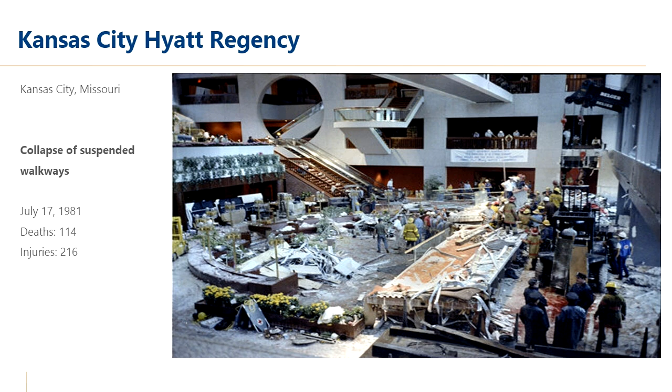The so-called skywalks were suspended from the roof framing. The second floor walkway was suspended from the fourth level walkway. The collapse initiated at the upper level connection near the middle of the walkway. The hanger rod between the roof and fourth level is represented by the blue dashed lines.

The walkway collapsed due to two mistakes. First, the connection detail was inadequate. The connection of the hanger depended on the transverse bending strength of two small channels welded toe-to-toe, which folded inward at the hanger rod connection.

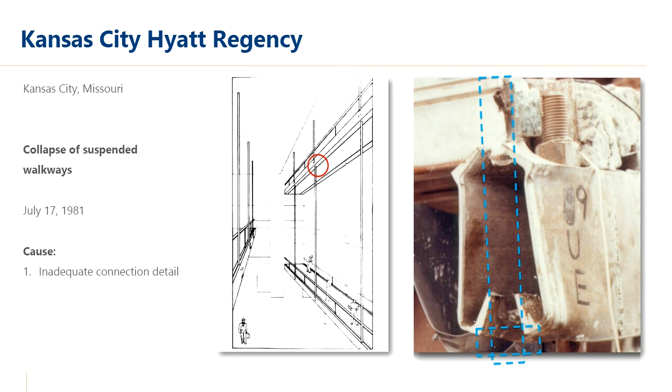Second, the hanger rods were reconfigured, as can be seen by comparing the design connection detail at the left to the as-built detail to the right. The reconfiguration doubled the amount of load transferred at the fourth level connection. These mistakes led to twice as much load being transferred at a connection whose design was inadequate in the first place.

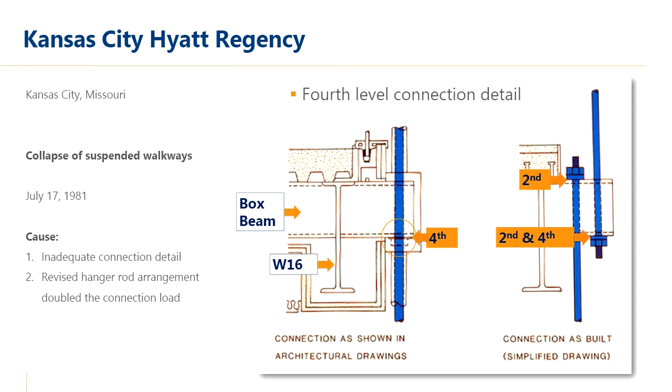In September 1996, six months after the post-tension concrete bridge was retrofitted to correct midspan sag, the 790-foot main span of the Koror-Babeldaob Bridge, also known as the KB Bridge, suddenly collapsed into the Toagel Channel. The cast-in-place post-tension box girder bridge was built in the mid-1970s. Two motorists were killed and four more were injured. Local fishermen and dive shop operators managed to save many more who plunged into the 100-foot deep channel with a swift tidal current.

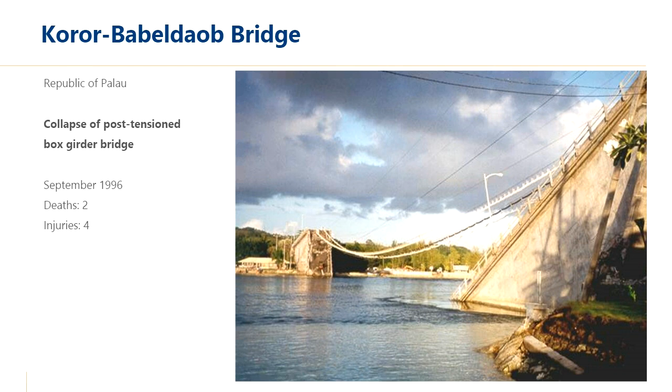This slide illustrates the final retrofit design to correct the midspan sag. After value engineering, the designer agreed to add 8 new post-tensioning tendons inside the box, shown in green, as well as flat jacks in the center hinge, used to lift and separate the cantilevers. The final step in correcting the sag was to add a 240-foot concrete ramp in the midspan region.

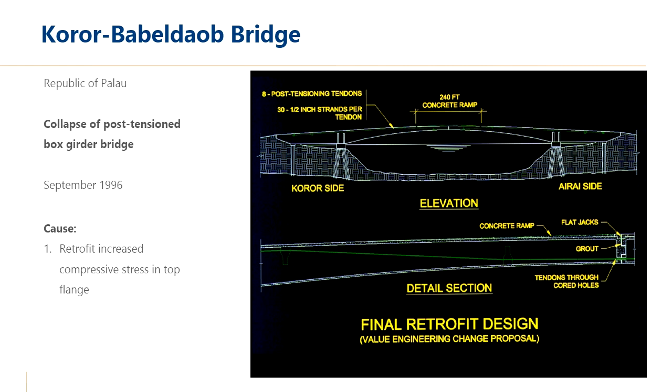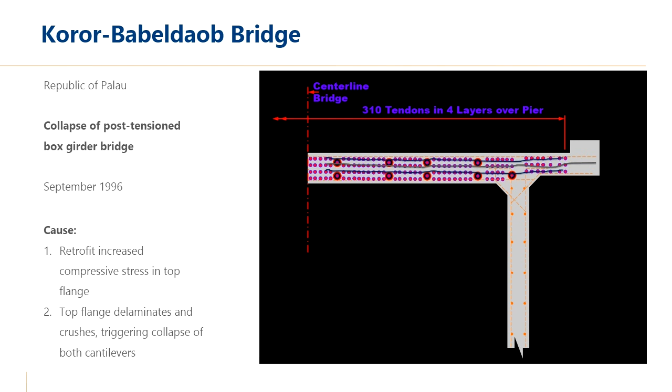The retrofit, especially the flat jacks, added considerable compressive stress to the top flange. Over the pier supports, there was very little concrete between the post-tensioning tendons. As such, the added compressive stress led to planar cracks between the tendons, separating the flange into multiple layers. This in turn led to compression failure of the top flange due to buckling of the individual laminations, a phenomenon known as lamellar buckling.

The next series of slides illustrates the progression of the collapse after compression failure on the Airai side of the bridge.

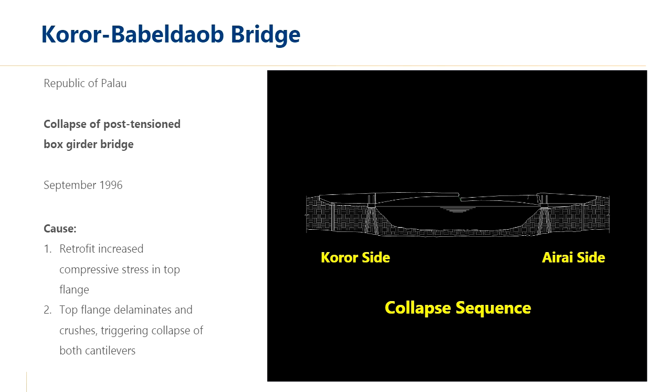Loss of the top flange triggered compression failures of the web walls and bottom flange, such that the Airai side cantilever shifted to the right, opening the center hinge. As the Airai cantilever collapsed, the new construction tendons pulled down on the Koror cantilever. Both cantilevers then collapsed, eventually coming to rest on the bottom of the channel.

The Twin Towers of the World Trade Center collapsed on September 11, 2001, shortly after hijacked airliners flew into the towers. The terrorist attack killed 2,752 people, including passengers and crew of the 2 airplanes. Following the attack, hundreds of police, firefighters, contractors, and engineers, as well as volunteers from across the U.S., worked to rescue survivors, recover bodies, and clean up the site.

It's truly heartbreaking.

As to cause, NIST, the National Institute of Standards and Technology, concluded that the collapse of each tower resulted from the combined effects of airplane impact damage, widespread fireproofing dislodgement, and the fires that ensued.

From a structural engineer's perspective, it is noteworthy that the towers remained standing after the initial impacts. In spite of severe structural damage, the North Tower stood for 1 hour and 42 minutes after impact. The South Tower collapsed 56 minutes after impact.

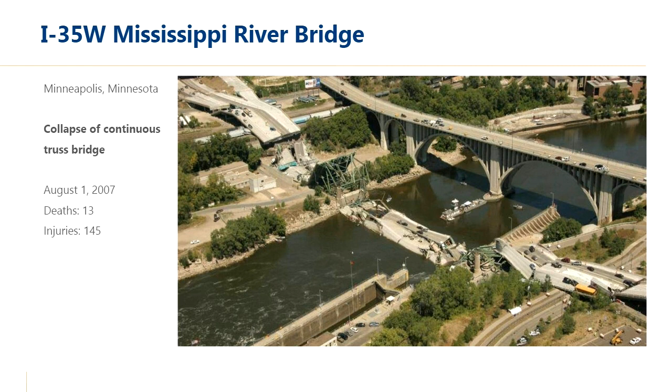During the evening rush hour on August 1st, 2007, the I-35W bridge suddenly collapsed, killing 13 people and injuring 145. The central navigation span of the continuous below-deck truss bridge was 456 feet long.

Emergency personnel and civilians worked through the night, rescuing people who were trapped in their vehicles. 75 local, state, and federal agencies were involved in the rescue and recovery.

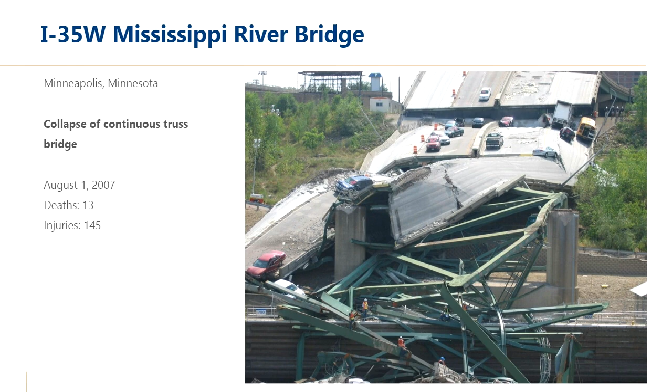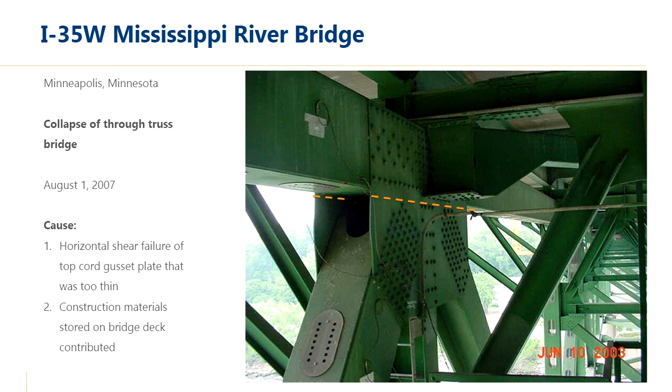Most investigations, including separate investigations by NTSB and WJE, concluded that the primary cause was horizontal shear of the top chord gusset plate along the dashed line shown here. The gusset plates should have been thicker, in other words, a design error. Construction materials stored on the bridge contributed.

Thanks for introducing those, Gary.

The final collapse that we'll talk about today is the most recent one as well, and that's the partial collapse of the Champlain Towers South condominium. Champlain Towers South was a conventionally reinforced 12-story, 136-unit beachfront condo in Surfside, Florida, and it was constructed in 1981.

The partial and disproportionate collapse of Champlain Towers South was devastating, an event that occurred on June 24th, 2021, just over 3 years ago now. This tragedy claimed 98 lives and has profoundly impacted the local community in Florida, as well as how we treat buildings and inspections of buildings statewide.

Following the collapse, the Condominiums Association's receivership hired WJE to assist in the investigation and provide expert witness and consulting services. In the next few slides, we'll briefly discuss some of the critical factors that contributed to the collapse.

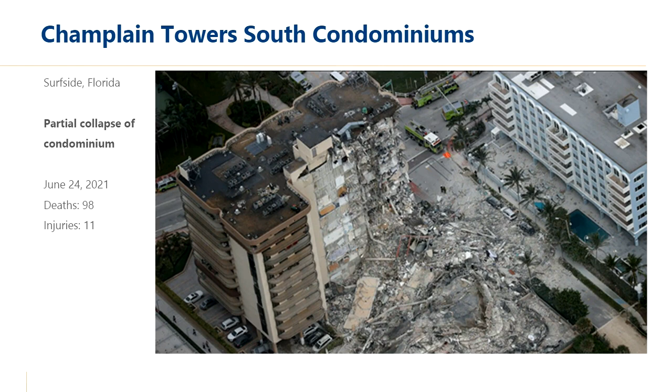In 1996, a contractor working on the structure along with an engineer added more load to this deck. It was not originally covered with pavers, which also include a sand bed layer and waterproofing.

This is significant. Video and evidence and eyewitness reports confirmed that the pool deck actually collapsed first, about 7 minutes before the rest of the building. Unfortunately, the engineers working on site missed telling signs of punching shear related distress.

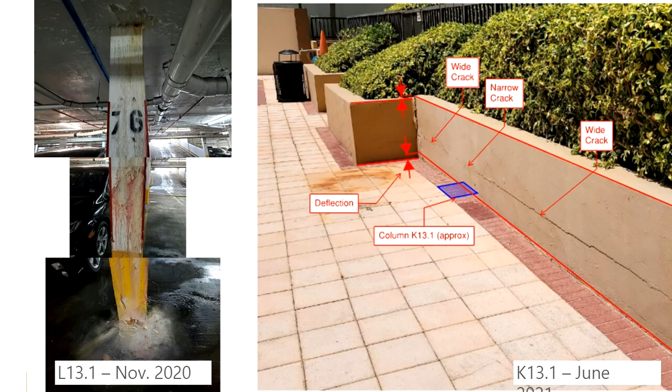And here are two of those photos that we found. Consider the photos from November of 2020 and of June of 2021. On the left, we see a photo showing efflorescence and water staining on a column. This is indicative of punching shear related distress.

The photo of K13.1 on the right is just taken a few weeks before the collapse and shows large vertical movements of the pool deck reflecting into the planters. Unfortunately, neither of these really sound an alarm to shore or to stabilize the structure.

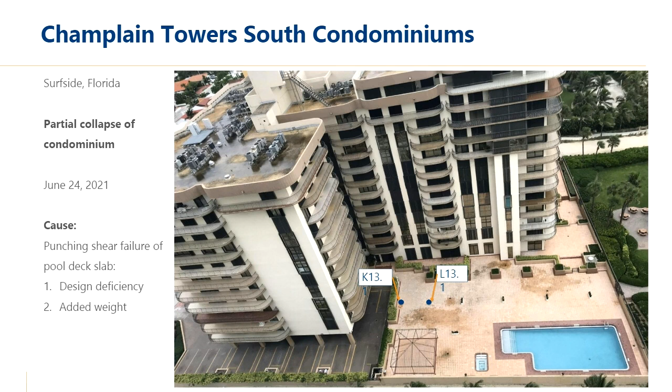So now let's take a cut and look around K13.1 and see how the collapse manifested. Imagine we're standing at L13.1 looking west, away from the beach, at the slab prior to any failure, in its original state. Given the design failures, the significant under-design of the structure, shear and flexural cracking were highly likely, as shown here.

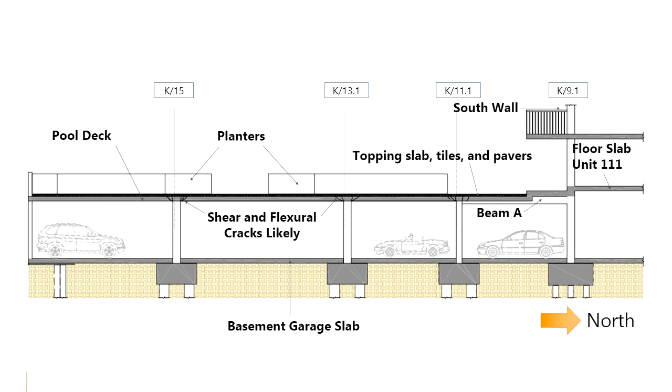We know that around early June 2021, just a few weeks before the collapse, there was significant movement of the slab, reflecting into the planters, showing this distress in the animation. On June 24th, 2021, at about 1:10 in the morning, the pool deck collapsed as a result of punching shear failures.

And to explain that, with pen and paper: it's a mechanism essentially where the deck comes down and the column punches through, right? That's all it is. And it was here.

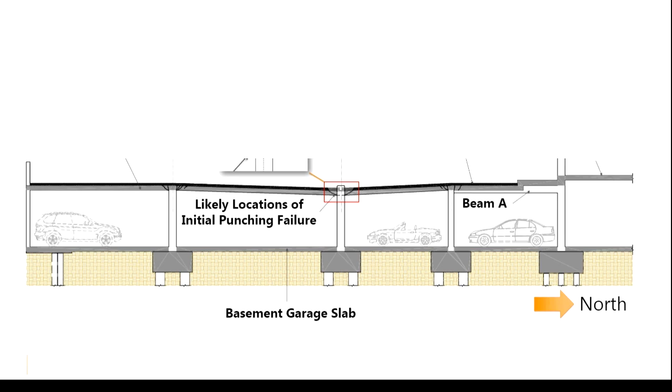As this building moves and deflects under large displacements, we start needing to consider horizontal forces. Those forces, represented by the orange arrows on the right, damage the columns at the south face of the building, which is why the building appears to be collapsing from the south.

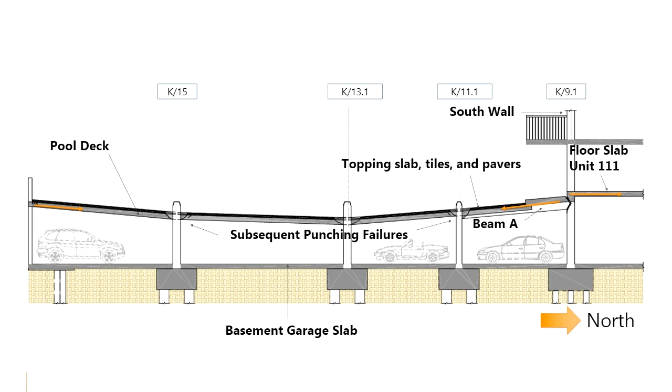There was significant movement of the columns once the collapse of the pool deck happened, reflected and confirmed by video footage and eyewitness accounts. Finally, the building collapsed about 7 minutes after the collapse of the pool deck.

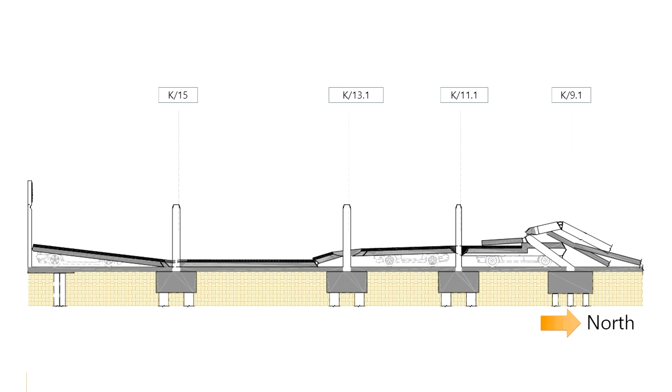So this building both suffered a disproportionate collapse, where a small collapse led to a larger collapse, and thankfully only a partial collapse of the rest of the structure.

I know you may want more detail as to why these tragedies happened. Let me apologize in advance: as I said, our objective is to explain what to expect in the aftermath of a collapse and describe the key steps in the investigation. There is simply not enough time to explain the technical causes of these collapses in more detail. However, in the resources list on your screen, there are links to articles, reports, and presentations that delve into the causes of these collapses.

So let's get into it. What happens in the aftermath of a failure? The key considerations are rescue and recovery, site control and safety, who the interested parties are, the need to preserve key evidence, and finally restoring service or resuming construction. Details will be provided in the slides that follow.

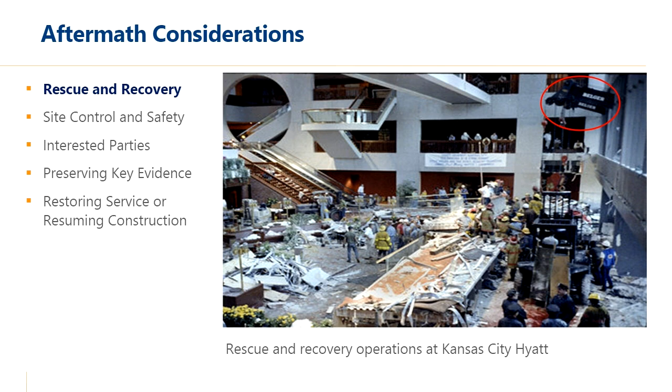Regarding rescue and recovery, using the Hyatt as an example: after the collapse, emergency medical teams, firefighters, and police worked through the night to rescue survivors. Local construction contractors provided equipment, including forklifts and cranes. The crane used to lift the walkway segments was positioned outside the hotel, shown in the red oval on the slide. The crane boom broke through the plate glass windows. The rapid and coordinated response is considered a textbook example of how best to respond to a major collapse.

Immediately following the Champlain Towers collapse, a significant search and rescue effort was undertaken, and the site was controlled by both Miami-Dade police and fire units, as well as FEMA, which sent urban search and rescue units to the site. In addition, other parties helped throughout the rescue and recovery effort, including the Israeli Defense Force and members of other nonprofit organizations. This site then remained a rescue and recovery operation for nearly a month.

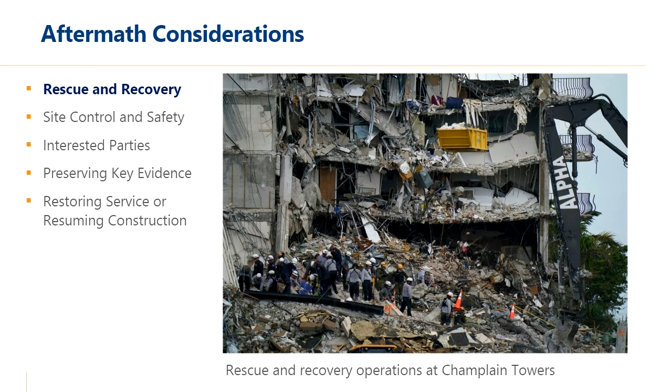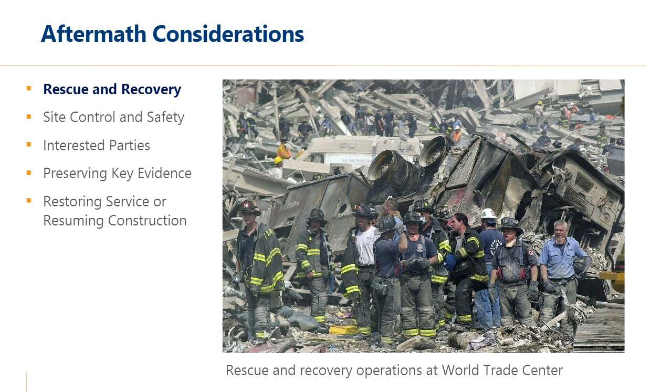In the wake of the World Trade Center collapse, the tireless work of police, firefighters, and other first responders was amazing, especially in the early hours. Structural engineers provided support to police, firefighters, and construction workers to investigate the condition of partially damaged buildings and potentially unstable debris piles. The structural engineer's role was in support of the primary first responders, and I was part of that effort, seen here assessing the safety of a subway tunnel underneath the debris.

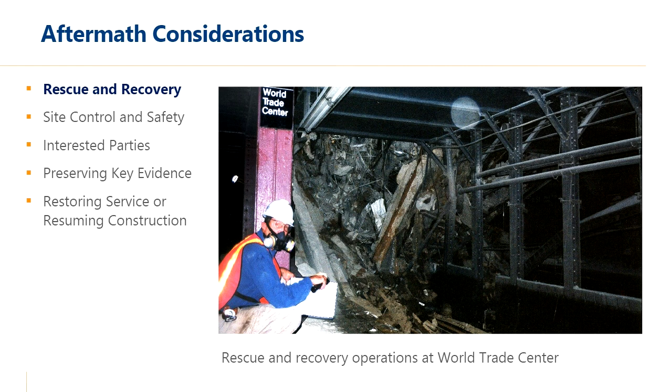The key takeaway is that during rescue and recovery, the first responders are in charge and calling the shots, but they may need outside support, such as rescue teams, search and rescue dogs, heavy or specialized equipment, and even structural engineers. In my experience, these groups are anxious to help in the wake of a disaster.

Now let's move to site control and safety. It may not always be clear who is in charge in the aftermath of a collapse.

Usually, if the facility is in use, the owner or property manager has control of the site after it is turned over by the rescue and recovery team. Facilities under construction are in the control of the contractor or construction manager.

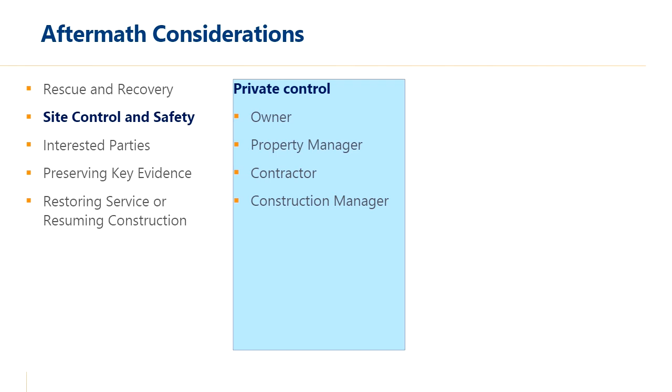However, government agencies may also exercise their right to carry out an investigation. And if criminal activity is a suspected cause, law enforcement may declare the site a crime scene and assume control, which is what happened after the Champlain Towers collapse.

By law, the National Transportation Safety Board, or NTSB, is required to investigate bridge collapses that result in loss of life. The site and key evidence are under their control, and they have the power to subpoena and interview involved parties.

The National Construction Safety Team, NCST, operates under NIST. NCST chooses their investigations based on the significance of the collapse. Of course, they chose to investigate at Champlain Towers.

Finally, if the site is under construction at the time of the collapse and workers are injured, OSHA may investigate.

Collapse sites are inherently dangerous, and the safety rules developed for construction sites do not necessarily apply. Early on, access should be limited to personnel trained in site safety and collapse investigation.

While access to construction sites is usually controlled, there is no security perimeter in place following collapse of a facility in use. The media and general public will attempt to gain close-up access. Immediately following the collapse, the local police can be helpful in setting up and enforcing a temporary perimeter until more permanent security measures can be established.

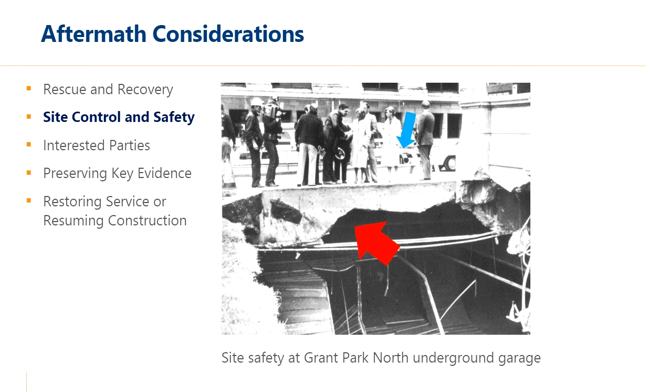As I said, collapse sites are inherently dangerous.

Within 2 or 3 days after the collapse of the World Trade Center towers, officials developed guidelines for site safety and personal protective equipment. Respirators were provided to everyone entering the site, and their use was strongly recommended.

As soon as practicable, site-specific guidelines for safe access should be developed and, of course, followed.

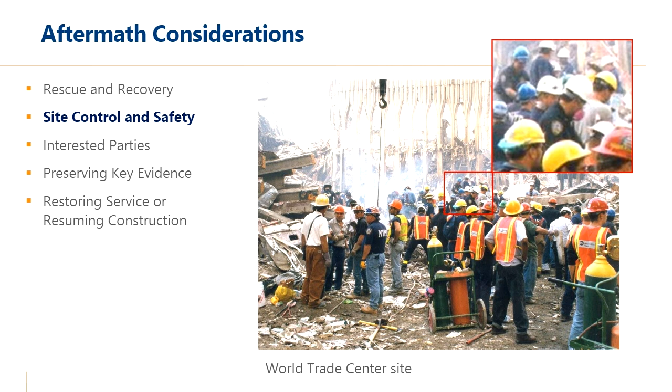At Champlain Towers, every site takes a life of its own, and I think Gary will add to this here in a few minutes. The police constructed barricades and blocked off several city blocks.

This brings up my most recent brush with the law, which was right after the collapse happened, and not just right after, but several weeks after, the site was heavily restricted. However, we were hired by the ownership group.

So after the initial immediate response had subsided, I went to the site and attempted to gain access on behalf of our client, to understand what was going on and make observations. Unfortunately, that was met with a trespass warning and severe displeasure from the local police department. It wasn't really until almost 3 months later that I was able to gain access to the site.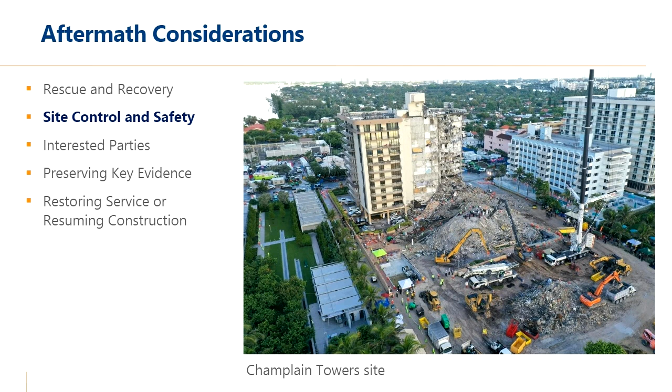I've had different experiences at other collapse sites. So every one of these is different.

Undoubtedly, when there's a collapse, especially when catastrophic, many interested parties will be involved, whether it be the ownership or other stakeholders. That includes property managers, a contractor if the site is under construction, their construction manager and subcontractors, and suppliers if certain pieces of equipment were used.

Designers will always be there, and that will often be the structural engineer of record. Other interested parties that will typically appear are the attorneys representing the stakeholders and victims, and also investigators for the stakeholders, whether those be other engineers like Gary and me, or other sorts of investigators, such as NIST and whatnot.

Politicians will always and almost undoubtedly be at the site. As you saw with Jane Byrne at the Chicago garage collapse, politicians were also very good at getting access to the site and getting photos. The media will undoubtedly be very interested in a large collapse, and that is not any different with Champlain Towers, which we'll talk about next.

Following the Champlain Towers collapse, the mayor, Levine Cava, and Governor Ron DeSantis and their offices organized and coordinated state and federal resources. After the collapse, there's always, as I mentioned, an overwhelming media interest.

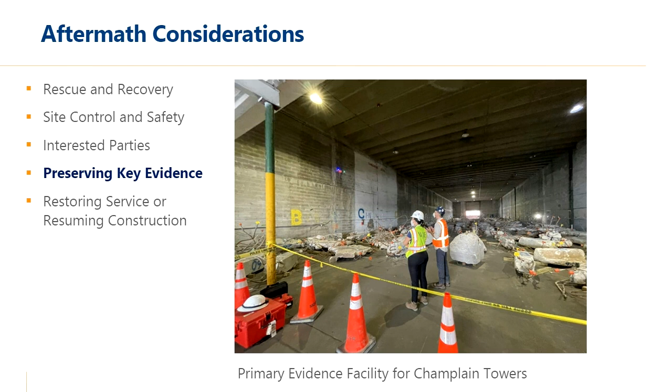So tight, you can see that if you look at the ceiling, not many of the lights are working. There was really no way for them to replace lights and deal with any of that sort of maintenance level kind of issues inside of their building. To that end, they have since subsequently moved evidence into a different area for a better investigation.

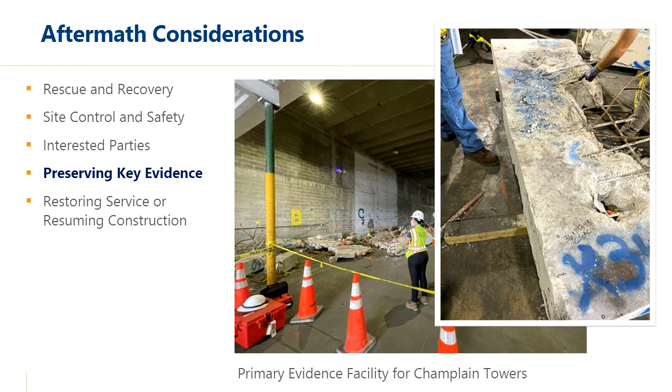Here you can see one of the most useful pieces that we found there, and that's my hand pointing at half of a punched slab, confirming our thoughts and also providing additional evidence for our understanding regarding the construction at Champlain Towers.

Moving on to restoring service or resuming construction. Shortly after the responders have left, there's likely to be intense interest in restoring service to an operating facility or resuming construction of a partially completed structure. Costs associated with loss of use of an operating facility can far exceed the cost of repair, and there's a tremendous public cost when a vital transportation link is severed. Likewise, lost time due to partial collapse of a facility under construction can lead to delay claims that are greater than the cost of rebuilding the damaged area.

A few days after the Kansas City Hyatt collapse, shown here, we advised the hotel owner to move the walkway segments to a safe off-site warehouse before legal maneuvering prevented them from doing so. The ownership took our advice, relocating the walkway segments 5 days after the collapse, as reporters looked on from an adjacent office building. While the owner was criticized in the press, they were able to reopen the hotel just 3 months after the collapse. Years later, the owners switched innkeepers, and the hotel is now known as Sheraton Kansas City Hotel at Crown Center.

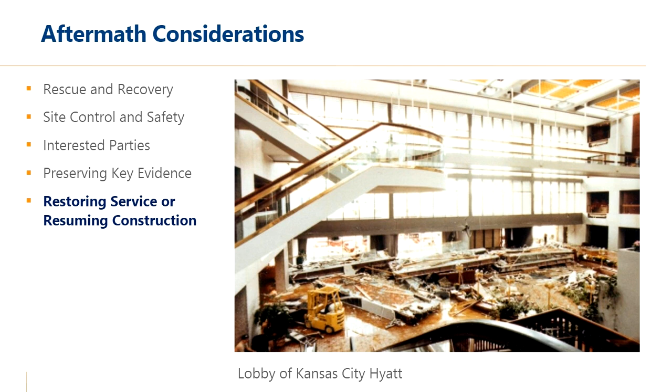Okay, let's move on to the investigation side. After the dust has settled and the first responders have turned over the site, the investigation can begin in earnest. Key steps and considerations include the investigation team, project document review, sharing information and resources, documentation of conditions at the site, procurement and testing of construction materials, structural analyses, and tests of surviving elements and replicas.

If you're an involved party looking for an expert, you should consider retaining a qualified investigation firm and expert as soon as possible, because other parties will be trying to do the same thing. A qualified structural engineering consultant can be of considerable help to the owner as well as public agencies responsible for collapse investigations. Both investigation experience and expertise are important.

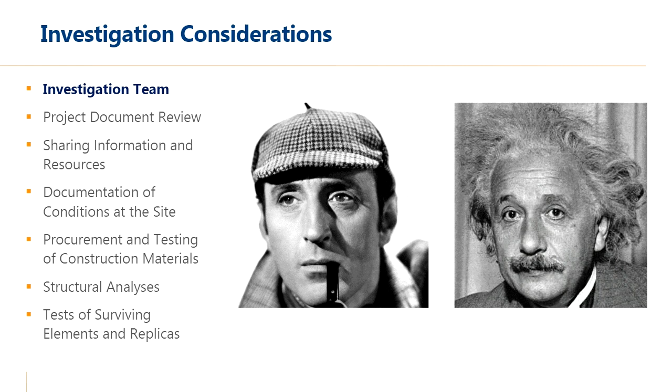Clients rely on experienced structural investigators, like our friend Sherlock Holmes, for advice as to how to determine what happened. At the same time, lead investigators must have established expertise, as represented by Albert Einstein, to lend credibility to their investigation findings and possibly their expert testimony in subsequent deposition and trial. If possible, the lead investigator should have both requisite experience and expertise. So this is the person you may be looking for.

Or maybe not. As Matt said, kind of a dad joke.

All right, moving on to project document review. After being hired to lead an investigation, I'm sometimes asked, where do you start? And the answer is, if possible, you should start by reviewing the available project documents before walking around the site willy-nilly, not knowing what you're looking at. Don't get me wrong, you should try to get to the site while the evidence is fresh, but it always pays to review available project documents in advance to formulate an investigation plan.

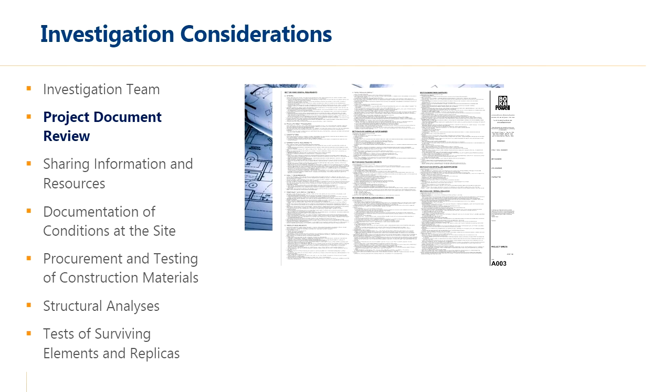These documents include plans, specifications, correspondence, engineering reports, relevant codes and standards, and of course photographs. As Matt will explain, finding and understanding the significance of photographs shown here was crucial in determining the cause of the Champlain Towers collapse.

Thanks, Gary. I showed this photo earlier, but finding this was critical to our investigation. It's important to request documents from involved parties, jurisdictions, as well as items that will be discovered as part of the litigation, and thoroughly review them. In the instance of the Surfside collapse, Surfside posted all documents that they had to a website. These photos that you see come from the engineer working at the site at the time.

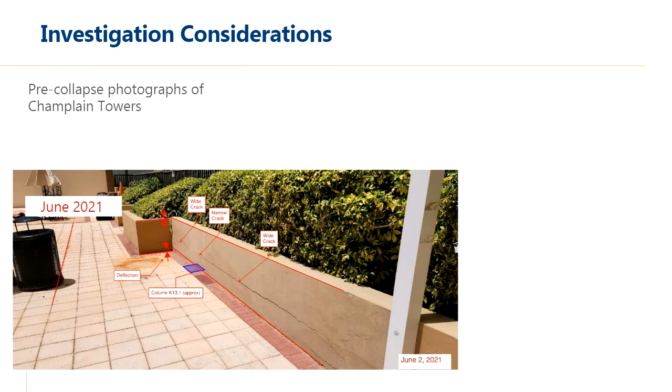Noting the distress to the planter, you can actually see in the very far left corner on top of the trash can the hand of the property manager. The property manager is showing the engineer what he's seeing and the distress to these planters. Ultimately, the engineer at the time attributed this to the plants or the roots of the plants causing this distress. But clearly, vertical movement wouldn't do that, or the vertical movement that we see wouldn't be a result of plants and roots.

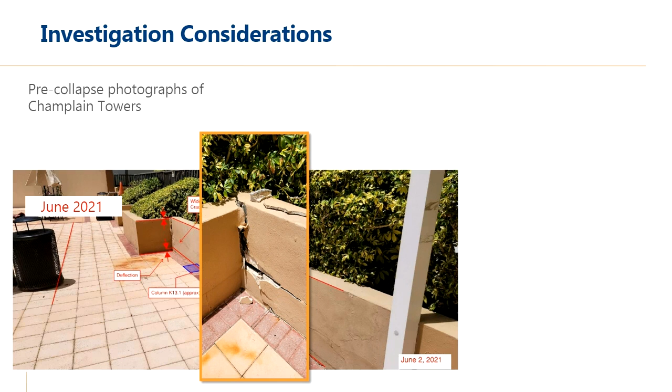A different designer had taken a photo of that same planter about a year before the actual collapse, and what we can see is there was no damage at the time. So it is important to look through many, many different photos. I spent many an hour clicking, looking at photos of nothing, and sometimes very interesting information comes up. We certainly wouldn't be as confident in our belief about what happened at Champlain Towers if we didn't have these photos.

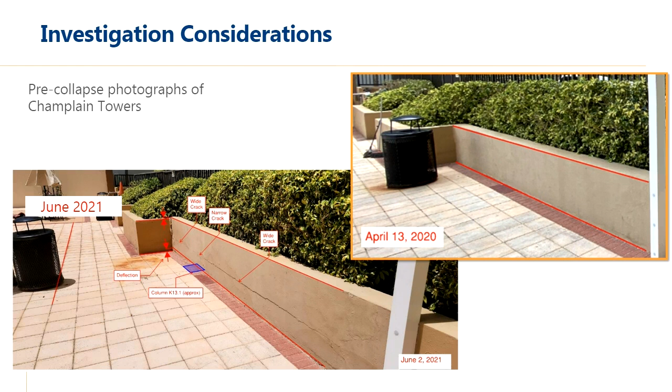At the same time, there will be many interested parties, and at Champlain Towers was no different. I've been involved in other investigations as well, where the parties have a shared protocol for testing. At Champlain Towers South, WJE was in a unique position because we were the representatives for the owner. The owner had some control of the site once it returned back to their control, essentially, although it was in litigation, and they had to be very careful with making sure that all parties were provided significant access.

Knowing that there was not enough samples and there was no need to have 14 different differing investigations happening at the site at the same time, the idea was put out to develop a joint testing protocol. The joint testing protocol really allowed every engineering firm to get what they needed done at the site in terms of sampling and measurements and other sorts of activities to be carried out by a third-party engineering firm that was indifferent to the investigation. This is not the normal, but this was what happened at Champlain Towers. Often, you will see, for smaller collapses, parties just doing their own thing.

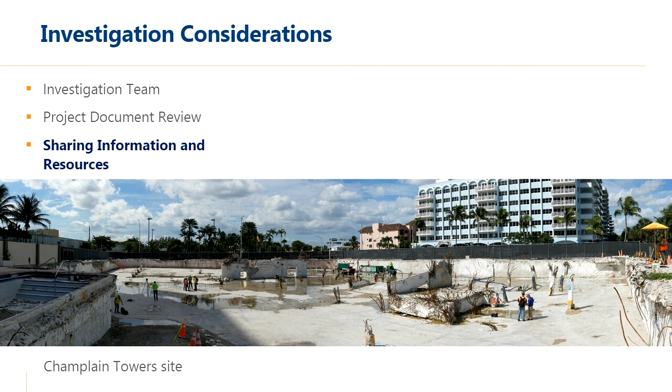After the 2007 collapse of the I-35W bridge, then Governor Tim Pawlenty directed the State Department of Transportation to hire WJE to carry out an investigation. The governor made that decision after receiving a recommendation from the governor of Massachusetts, Mitt Romney. A year earlier, Governor Romney worked closely with WJE to carry out a stem-to-stern safety audit of Boston's Big Dig after several precast concrete ceiling panels collapsed, killing a passenger on the way to the airport.

At the same time, NTSB claimed authority to conduct the investigation. The state and NTSB worked out an arrangement where WJE and NTSB would carry out parallel independent investigations, but share resources and access to evidence.

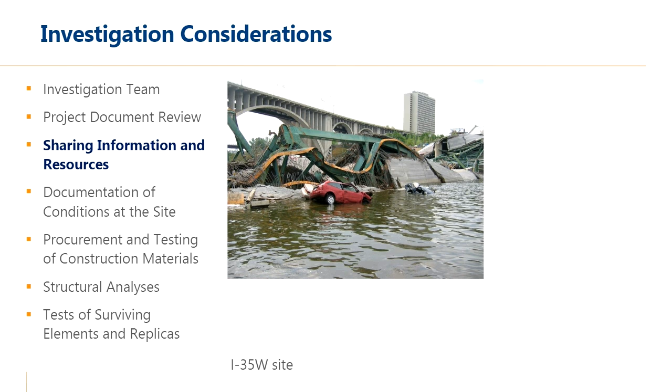One of the key steps was removal of truss members from the Mississippi River to a laydown area for subsequent inspection.

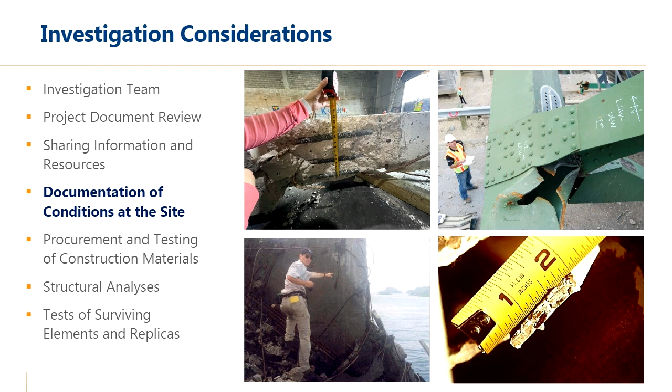Of course, the approach to documentation of site conditions varies considerably with each investigation. The following guidelines have proved to be effective. First, establish a reference system. The investigation team should endeavor to agree upon a common system to avoid later confusion when findings are issued and compared. Of course, document conditions using notes, measurements, and photographs, both aerial and conventional, and drones can be especially useful here.

Consider a 3D laser scan to establish precise positions of the collapsed members. You should survey impact and scrape marks that may help determine the direction and progression of the collapse. And pay particular attention to clean breaks as possible locations of failure initiation. Severe distortion is usually an indication of damage occurring after the initial failure at another location.

And finally, consider site instrumentation, such as measurement of thermal gradient or strain relief, or any number of things that may help in the investigation.

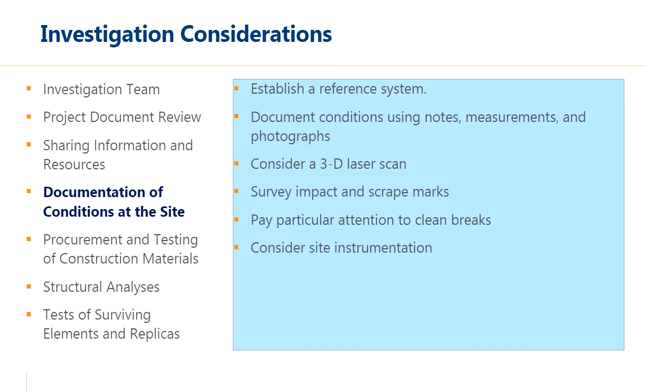In the case of a major bridge collapse like that of the Koror-Babeldaob Bridge, the evidence was underwater and could not reasonably be retrieved. So the best choice was to use scuba to document site conditions. We lined up a dive firm to help us, and all of the high-end dive shops were busy with tourist excursions, but we managed to find Fish and Fins who provided equipment and support and did a great job.

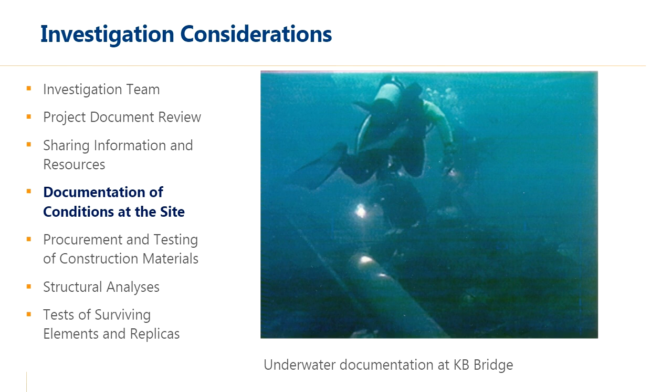A careful plan for procurement and testing of construction materials is required. As previously described by Matt, there is no need for duplicative tests by multiple parties if the investigation team can agree on a trusted independent laboratory. And realize that test results may later be challenged, possibly in court.

Tests should be carried out by experienced staff. If applicable, tests should be carried out in accordance with recognized standards, such as those available from ASTM International.

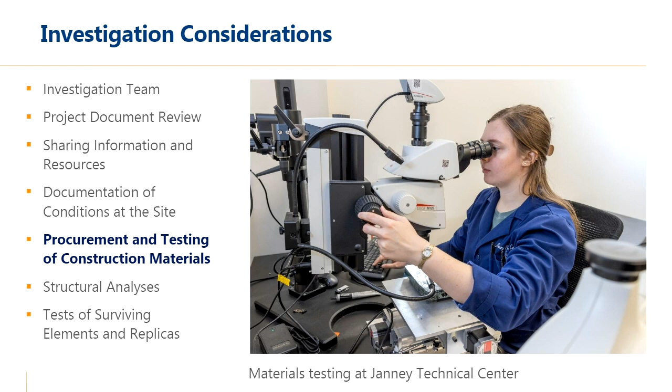Regarding my work in structural investigations, I can't begin to tell you how great it is to be backed up by the engineers and material scientists at the Janney Technical Center, shown here.

Nearly undoubtedly, when you have a structural collapse, there will also be a structural investigation or structural analysis as part of that collapse investigation. The analysis should be based on the material properties and conditions at the site at the time of the collapse. Understanding collapse is not understanding design. Code equations and simplifying assumptions used in design are often inappropriate and can be misleading.

For instance, at Champlain Towers, the punching shear capacities listed in ACI 318, those at the time of construction and those used today, may be inappropriate for the conditions at the site. Instead, use procedures and equations that will give a realistic prediction of behavior. For instance, something like critical shear crack theory would give a more predictable and more accurate understanding of the punching shear capacity of the slabs at Champlain Towers.

On the other hand, a separate analysis using code equations and design loads is appropriate to determine whether or not the structural design met the governing codes. And again, I earlier alluded to the fact that Champlain Towers was significantly underdesigned.

Here, you can see this model showing the design loads and capacities in the columns, essentially, at Champlain Towers during the collapse. This model was used for significant understanding of the different components and doing a thorough design review of the towers itself. We didn't find any significant misdesigns outside of the pool deck area. However, our scope wasn't extensive to every section or every slab of the entire building.

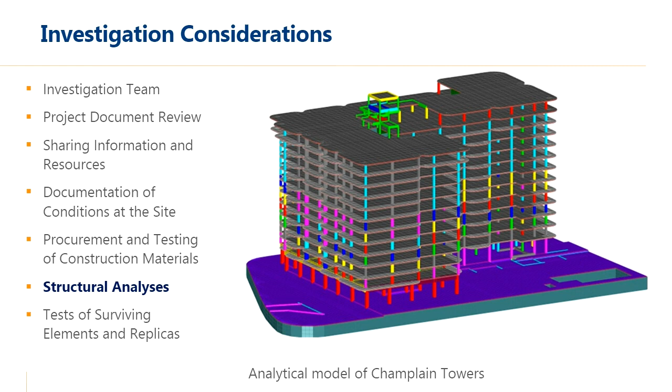It was Wernher von Braun, the famous German rocket scientist, who said, 'One test is worth 1,000 expert opinions.' Tests of surviving elements and replicas provide conclusive evidence. Of course, the test must accurately represent the conditions and material properties at the time of collapse, or at least you should account for any differences.

Agencies like NTSB and NIST take first choice as to the evidence to be examined and tested, so testing of replicas may be needed, which was the case after the collapse of the Hyatt walkways. Tests of replicas of the box beams in the Hyatt Regency, Kansas City were used extensively by several investigation teams, including the tests shown above, conducted in WJE's laboratory.

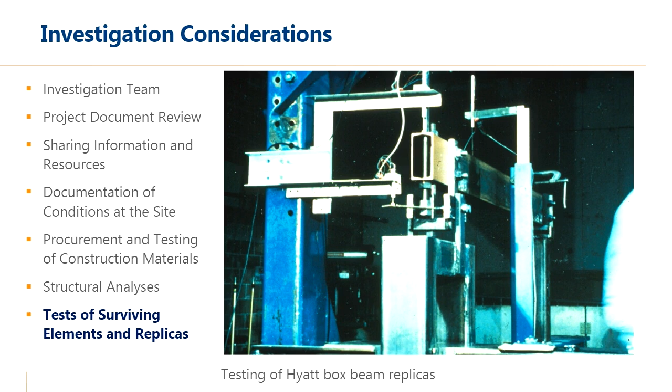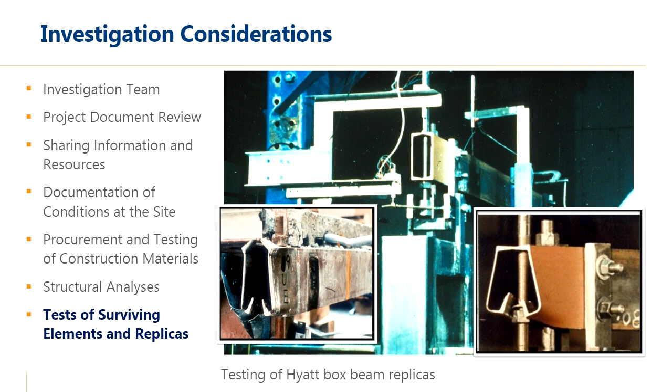Matt and I will leave you with one final thought. Each major collapse takes on a personality of its own. It's virtually certain that the details of the aftermath and investigation considerations will vary greatly from case to case, depending on the nature of the collapse, the involved party, as well as the type and extent of government involvement. We hope you never have to consider today's presentation as a party to a major collapse, but we also hope you found our observations interesting, informative, and useful. Thank you for your time, and Matt and I would be happy to address any questions.